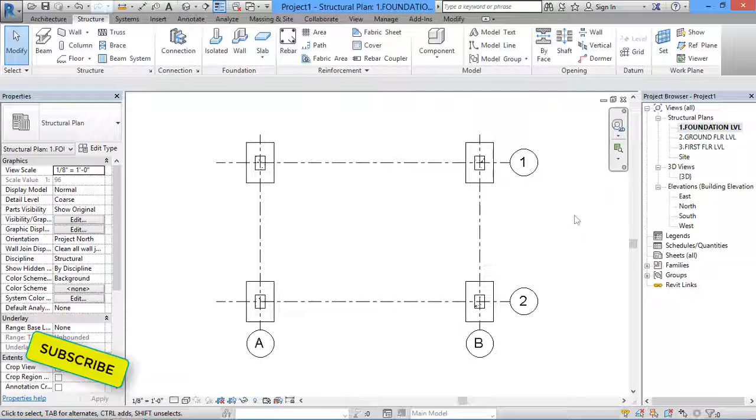Hello friends, today in this tutorial we are going to see how to assign structural beams in Revit structures.

First we have to see our project browser. In it we have three structural plans: foundation level, ground floor level, and first floor level. Right now I am in my foundation level plan. I have here 2 grids in X, 2 grids in Y, and 4 footings and 4 columns.

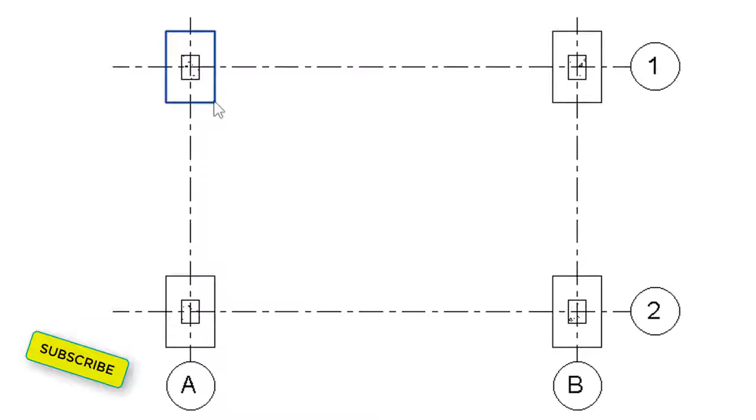Now I will show you the ground floor plan. This is my ground floor plan. I have here only columns because my foundations are in the foundation level. These columns are coming from the foundation level.

Now I will show you the first floor plan. This is my first floor plan, same as the ground floor plan, and these columns are coming from the ground floor. So our columns go from foundation to ground floor, and from ground floor to first floor.

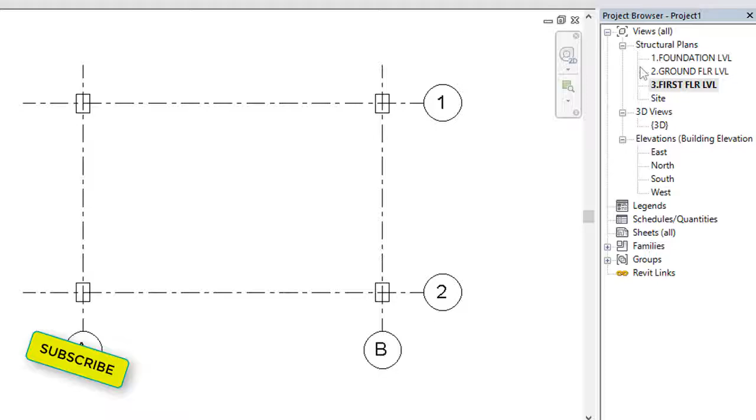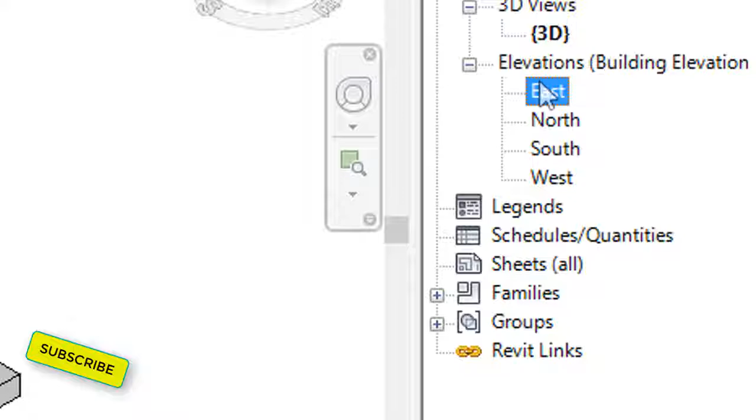Now I'll show you the 3D view of this plan. For the 3D view we'll go to the ribbon, click on view, then 3D view. Now this is my 3D view. So if you see here, I have footing and columns, and this column goes from foundation level to first floor level. I'll show you the elevation of this plan.

So this is the elevation. If you see on the right side we have the levels. So my column is starting from foundation level and going from ground floor to first floor.

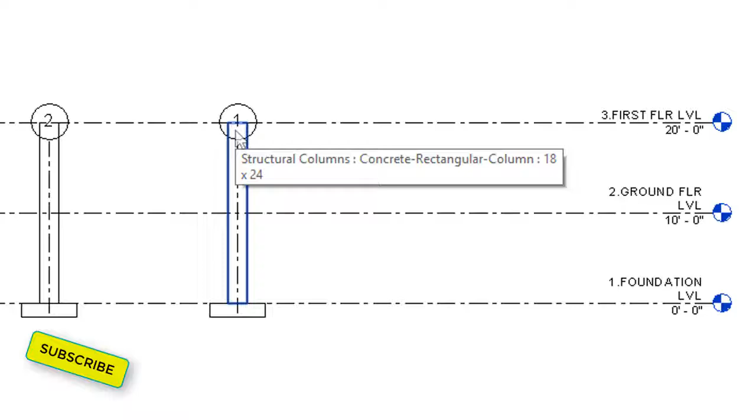Now here we will assign the grade beam or plinth beam, and then the drop beams or floor beams. So two sets of beams we are going to assign: on the ground floor and then on the first floor. Now for assigning beams on the ground floor we'll go to the ground floor structural plan, then to the ribbon.

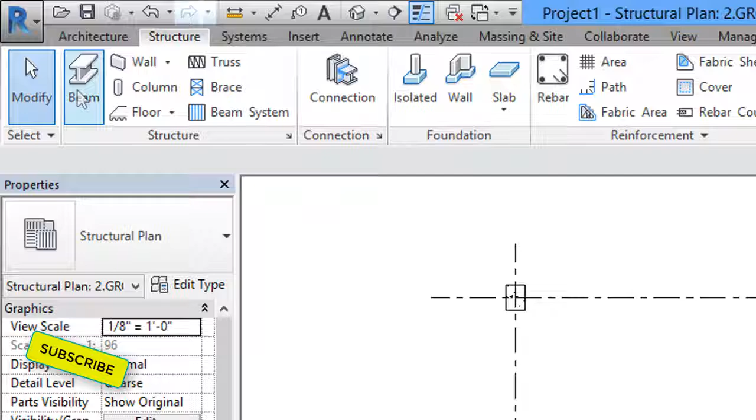In that ribbon we'll select the structure tab. In the structure tab, on the left side after modify we have the beam option. So click on the beam option. After clicking the beam option, in the properties palette you will get the default loaded beams, and from these you can select different types by clicking the type selector.

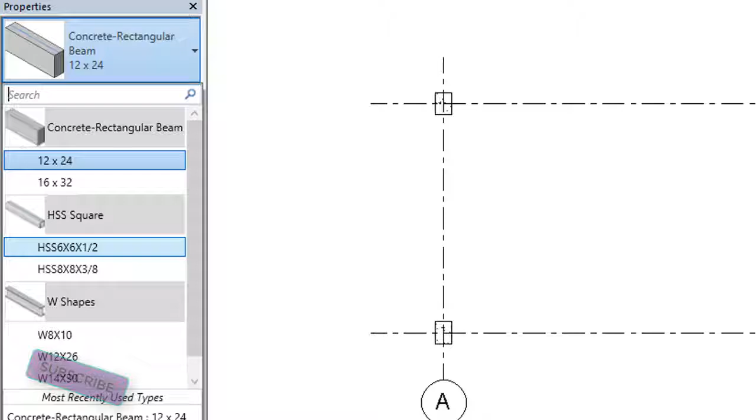If you see, you have concrete beams, rectangular, hollow square beams, and W shape beams, meaning our I-section beams. You can select any type, or you can load a different type of beam from the load family option in the modify place beam command. But here we are going to take a concrete rectangular beam of size 12 by 24 inch.

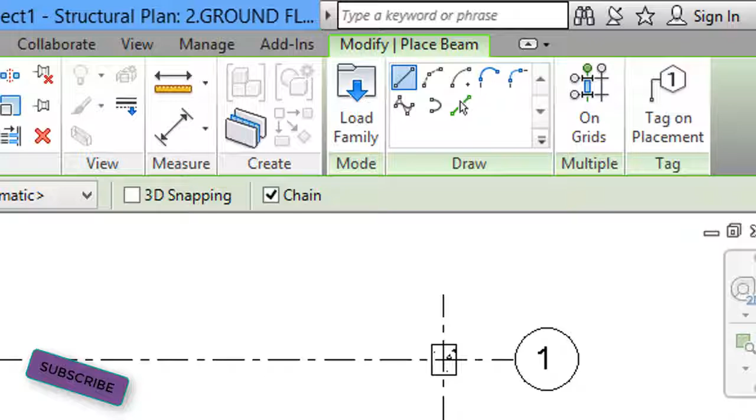Now this placement option is very important, which you are seeing here. I'll select line. Now before drawing we have to check some options on the modify place beam: the placement plane, to check which level we are placing on; structural usage automatic; 3D snapping should be unticked, but this chain option should be ticked. It will help us draw the beams continuously.

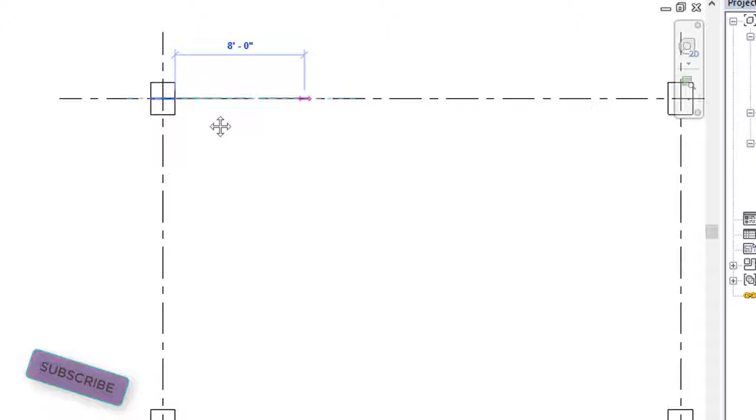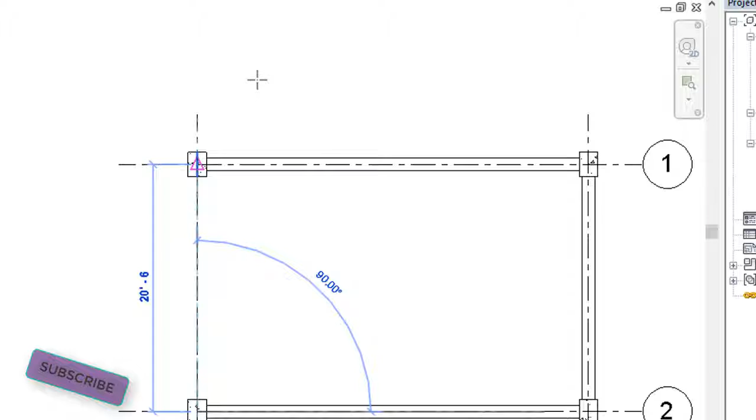Now we have to draw the beams. You can draw from center to center or from outer to outer, either way. I am selecting from outer to outer, or center to center — if you draw from center to center it will come out the same, or if you draw from outer to outer it will come the same. Now we are drawing these beams for the ground floor structural floor plan. Now my beams are completed.

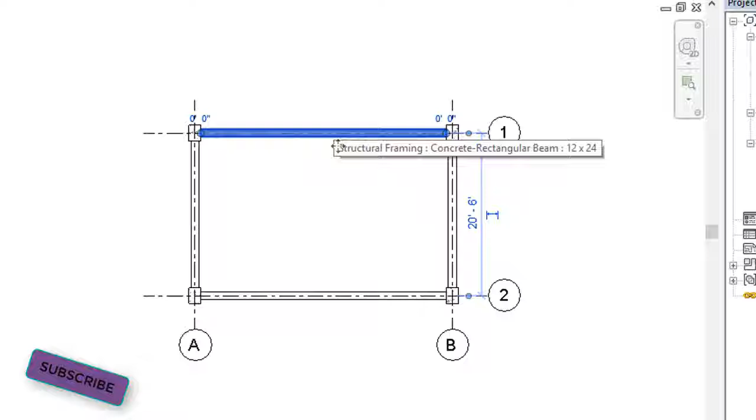Now we have to make the same kind of beam on the first floor. So what I will do is click on the ground floor plan, click any beam, and then right click. After right clicking, if you see the option, we have 'select all instances'.

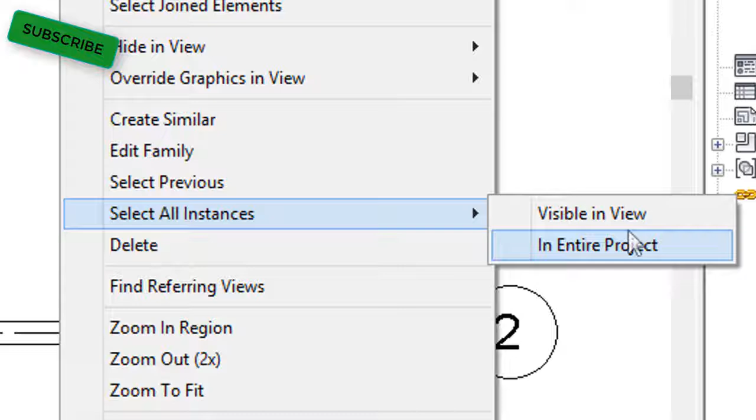If I click on that, I get two options: visible in view and entire project. I will select visible in view. So if I click visible in view, all the beams present in the ground floor plan will be selected. Now after selecting this, I will press Ctrl+C for copying these beams.

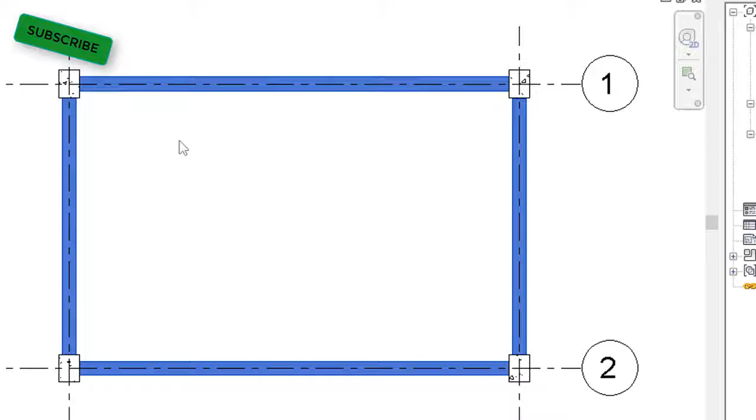Now after copying this beam, I will go to the first floor plan. Then in the modify tab, modify structural framing, I will get the paste option on the left side. In the paste option I'll click the arrow, then we get different options for pasting.

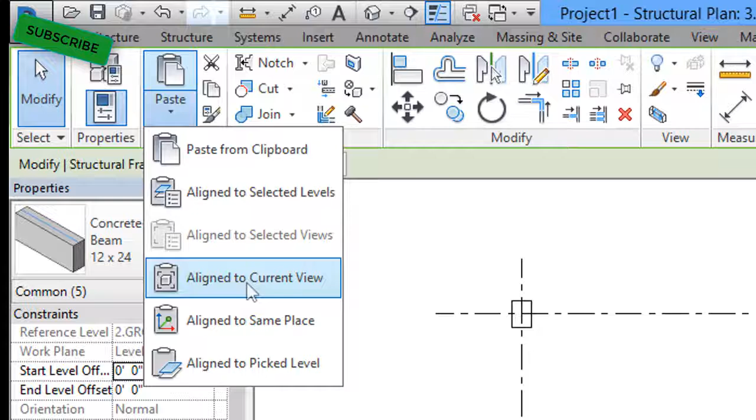But I'll select 'align to current view', the fourth option. If I click on align to current view, these beams which we copied from the ground floor will be pasted on the first floor. So this is the 3D view. Like this, if we have created beams on any floor like the ground floor, we can copy the same beam to the first floor, second floor, third floor, anywhere.

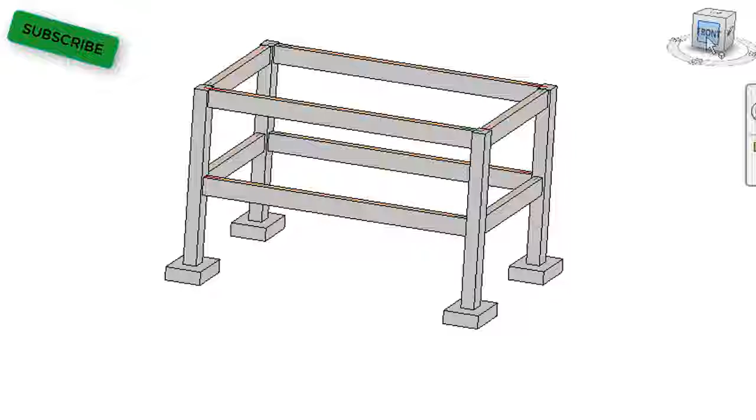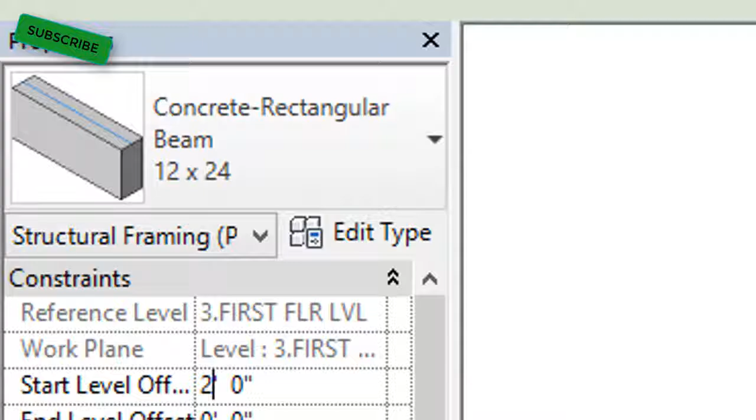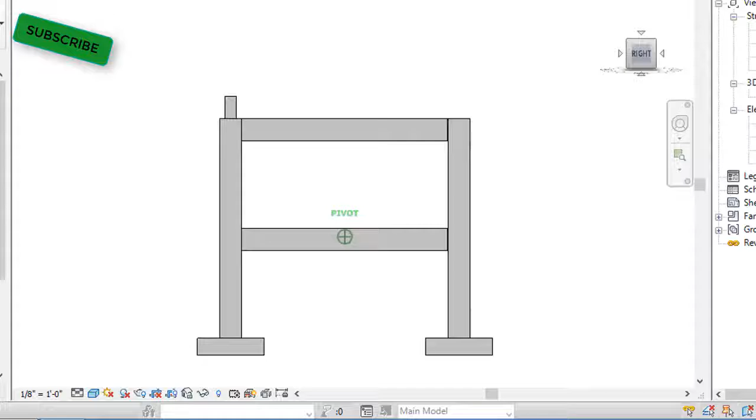Now this is the procedure for following. Suppose you have to change the level of these beams, and sometimes some columns will be at a different level. For that we have to look at the start level offset. In the start level offset we can change it — suppose I give a value of 2 feet, then if I apply, my beam will move upward 2 feet from the reference level. Now on the end level offset also, if I give 2 feet, then it will be aligned, meaning it indicates that from the first floor the beam is 2 feet above.

So like this we can assign beams in Revit structures. This will help us in creating high-rise buildings. You can also change the reference level, but if we change the reference level, we have to check the start level offset and end level offset.

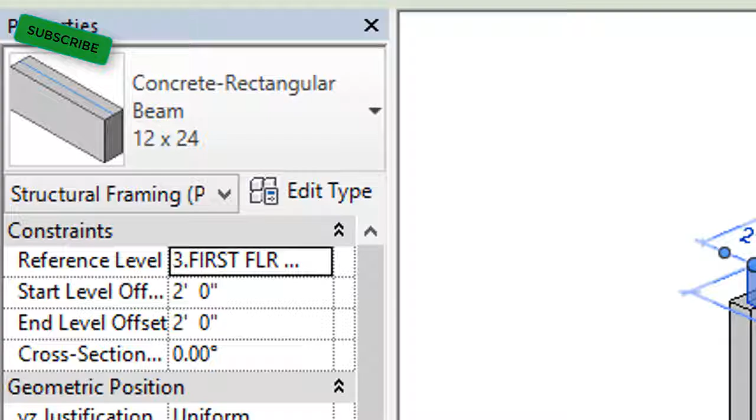So friends, this is the procedure for assigning beams in Revit structure.